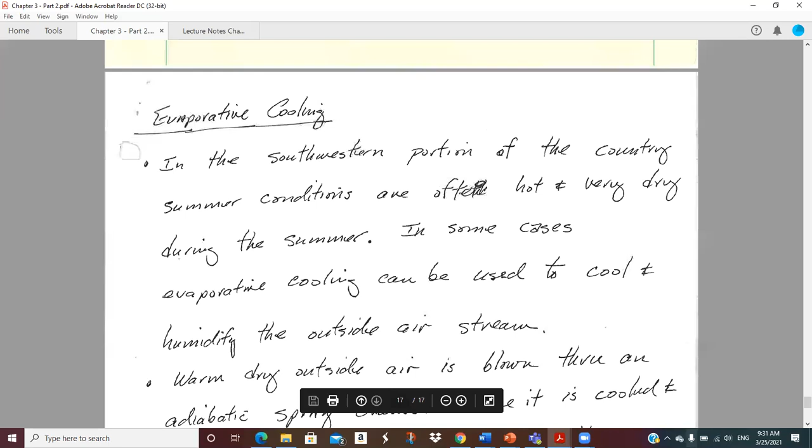Okay, let me see here. So this is our last topic in psychrometrics. You can tell this note page is not quite as old as the other one - it's not yellowed. Actually, they're yellowed because they're engineering paper, but this is just a white piece of paper. Anyway, so: evaporative cooling.

This is something we've kind of hinted around at, but we really haven't discussed the topic directly. In the southwestern part of the U.S. primarily, and other areas you might see this, typically areas that are pretty dry.

We can create air conditioning by evaporative cooling, which means all we need is a water source, a little pump, a fan, an enclosure, and some sort of cheesecloth or membrane that we can keep wet, and pass air through so the water evaporates. That evaporation process brings on enough cooling that we can actually cool a house. It's so dry in the Southwest that they want the water vapor in the air as much as they want the cooling, so it's a double win-win situation.

Now, unfortunately, when you get up to the eastern part of the U.S., the humidity and moisture in the air is such that they don't work very well, because the air coming in is not dry enough, and there's not enough potential to evaporate water vapor because the water vapor is already in the air. So you don't see it too much there.

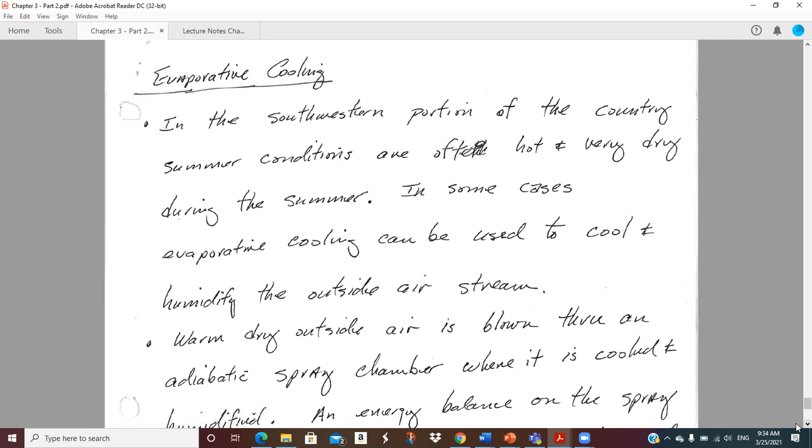Okay, so let me read my notes here, and I've probably already said most of this: in the southwest portion of the country, conditions are often hot and very dry during the summer. In some cases, evaporative cooling can be used to cool and humidify the outside airstream, which then conditions the space.

Warm, dry outside air is blown through an adiabatic spray chamber - well, that's the fancy engineering term. Basically it's an insulated cabinet, and you've got nozzles that atomize water vapor, and you blow it in there. But you've got to be sure everything gets evaporated, because you don't want to be blowing liquid droplets out of your diffusers. So usually there's some sort of membrane in there.

So the air goes through this adiabatic spray chamber where it's cooled and humidified. The energy balance on the spray chamber shows that the enthalpies in and out are the same, so it's a constant enthalpy device. The process line on a Psych chart is one of constant enthalpy.

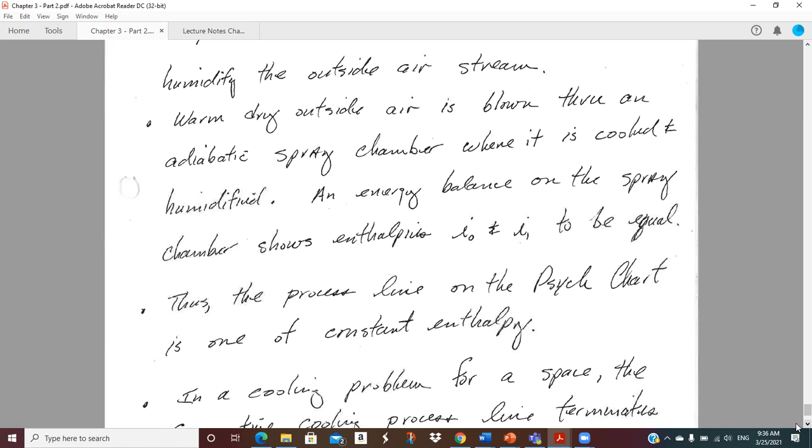Now, folks, you need to know that - that's probably the most important thing, other than just understanding in general what evaporative coolers or swamp coolers are all about. You need to know how to draw the process line on a Psych chart: it's a line of constant enthalpy. That's not very hard, but it's hard if you can't remember it. So remember it. Write it down. Do something.

In a cooling problem for a space, the evaporative cooling process line terminates at the space condition line, giving the amount of outside air needed to satisfy the load. Okay, so you can read that over again.

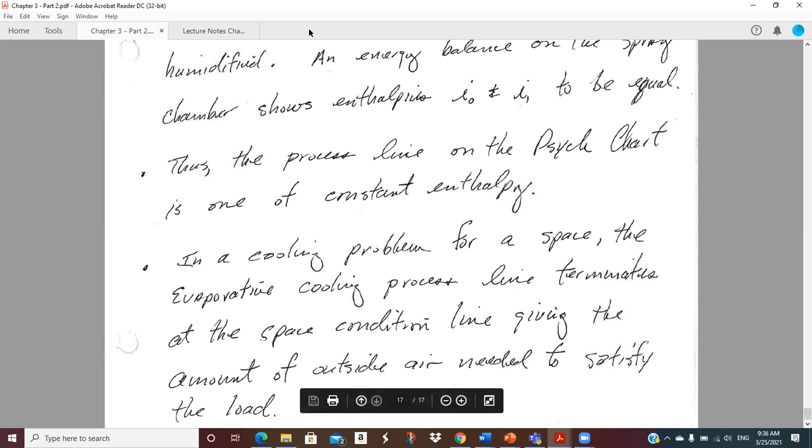Let's look at a diagram here. Get some pictures, pictures always help. Let me make it a little bit bigger. So there is our adiabatic spray chamber, i.e.

a swamp cooler. So we're coming in at 0, which is whatever you've got outside. That outside air is being moved, and there's got to be a fan. I didn't draw the diagram, but that air is not going to move by itself, so we've got to have a fan in there someplace, which he's not showing. But anyway, we've got a fan sucking in outside air into this adiabatic spray chamber.

And it's got nozzles, or it's got a membrane, or somehow the air goes across that wet membrane. And basically we get evaporation, hopefully close to saturation coming out. It just depends on the specs of the unit and how good it is.

But anyway, we're going to pick up moisture, and that evaporation process will cool the air down. So the dry bulb temperature will drop, but the moisture level will go up until we get to 1. And then hopefully, if 1 is on the condition line, and we've run our loads and all that stuff, then bingo, all we've got to do is blow in the right amount of air, and we handle our air conditioning load, both sensible and latent, and we keep the space comfortable, and we didn't have to run a compressor or all that, the stuff that goes with a regular refrigeration system.

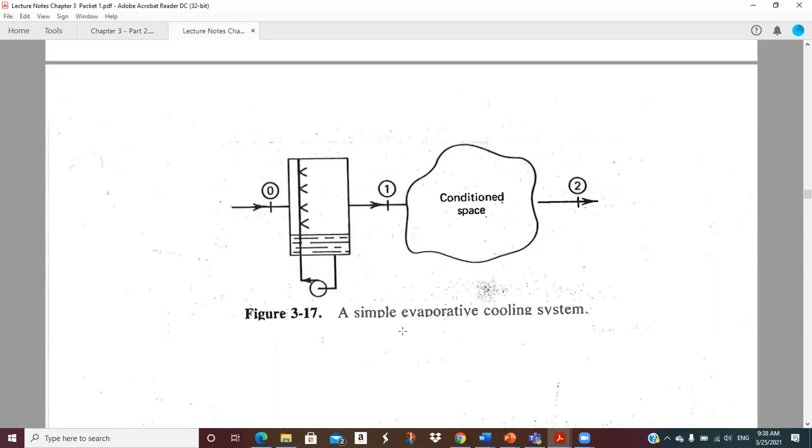So swamp coolers are pretty cool, no pun intended. Now let's go down to the psych chart.

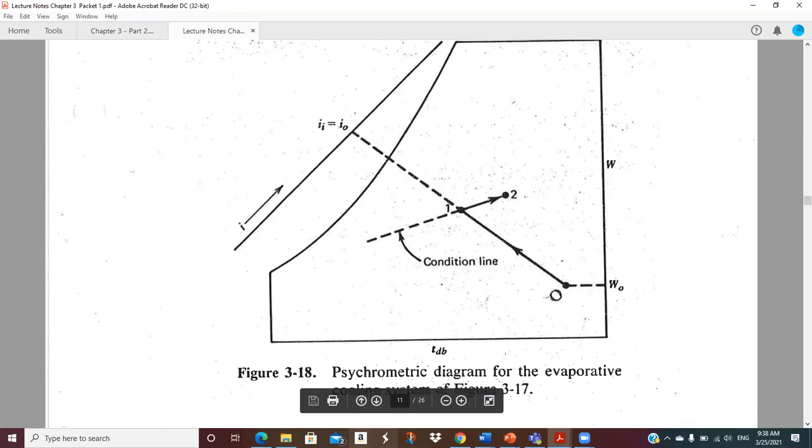There you go. So we've got our loads. We went to the protractor. Does he show... I don't think he shows a protractor on this. Nah, he didn't put the protractor up here. But anyway, we had our loads. We calculated our sensible heat factor. We went to the protractor.

We got the slope. We came down here, and 2 is the condition that we're maintaining in the space. And so it's air conditioning. So we drew our condition line with the slope from the protractor all the way down here someplace, okay? And then here's our outside air condition, whatever it is, it could change. But anyway, so you put a dot on the psych chart.

I have unstable internet, I just love this place. We still can't have good internet. I think you guys should start complaining about all the tuition you pay, and you can't even have stable internet. We can put grass all over the dadgum place. We spend more money on mulch and grass than we do on instructors, I think. It's ridiculous. I mean, it's nice to have a pretty campus, but I'd rather have stable internet and good teachers than green grass.

And if I was you guys, I would raise holy hell about that. And yes, I've recorded that, and I will post it.

Okay, so this is our outside air condition. And this is just a line of constant enthalpy. So whatever that enthalpy is, you find a line of constant enthalpy, and you draw that line all the way off the page, as far as you want to go. Make a line on the desk, I don't care. And if these two cross, then that's going to be the condition of the air that you want coming out of the evaporative cooler, because it's on the condition line. So it has the right amount of moisture and the right degree of coolness in order to offset your latent and sensible loads.

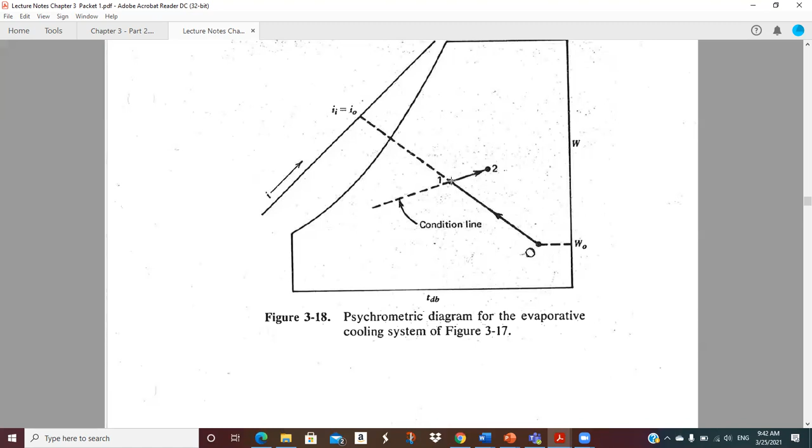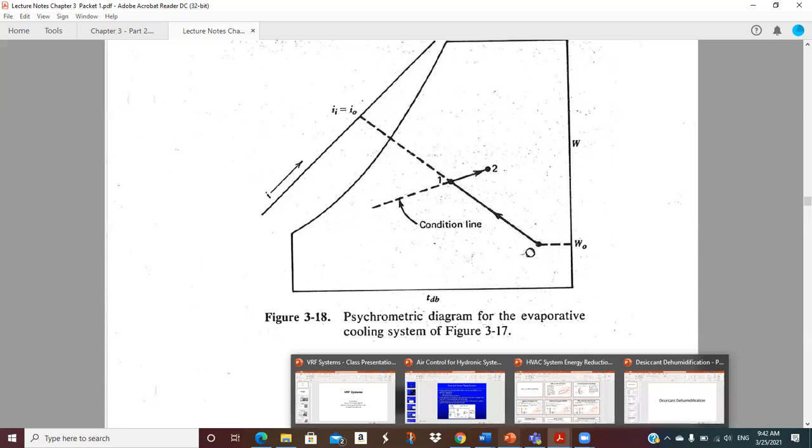Okay, let's see. So let's go to the Desiccant presentation here. And you guys have this. This is the last email that you got from me because I had forgotten about this.

So a desiccant is a material that has a great affinity for water vapor molecules. We're thinking about doing dehumidification from an airstream. So this moist air we consider to be dry air plus water vapor. Dry air is mostly nitrogen, oxygen, a little bit of argon, and an ever-growing amount of CO2. We lump that all together into dry air, and then we have water vapor.

So a desiccant is a solid material. Well, there are liquid desiccants, but in general in HVAC we usually use solid desiccants that you can put on a wheel or something you can force air across. And the water vapor molecules basically stick to the desiccant.

So in terms of grabbing molecules, there's absorption and adsorption. So this is adsorbed, and what that means is there's not a chemical reaction or anything. These desiccant materials have lots of little micro and nano scale cracks and crevices, all porous, and those water vapor molecules just stick to the surface.

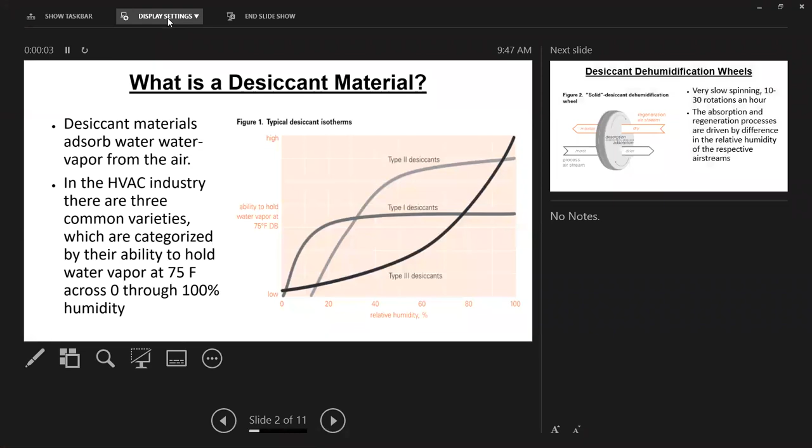Okay, so desiccant materials - that says 'ab' and that should say 'adsorb.' I'm going to change that right now. This was actually done by a student of mine a long time ago, and I didn't catch that. So it's adsorption, there you go. I've read this thing several times and didn't catch it. Just a little whoop-de-doo. Okay, they adsorb water vapor from the air. I'll fix that other one later.

In the HVAC industry, there are three common varieties which are characterized by their ability to hold water vapor at 75 degrees from 0 to 100% relative humidity. So that's how these things get characterized, and you see the plot over there - we've got type 1, type 2, and type 3. Type 3 are more recent, probably out there 15 years or so, but the other two have been out there much longer.

So if you look down on the bottom, you've got relative humidity from 0 to 100%. And then you've got just a characterization, low to high, of ability to hold water vapor at 75 degrees. So the temperature is not changing. We're just looking at this to give general characteristics. 75-degree air is just kind of a normal temperature in a space, something like that. So in order to put a curve like this, you got to pick a temperature, and 75 is just what got picked.

Okay, so the type 3 down on the bottom, when the relative humidity is low, like 0, 10, 20, 30, 40, 50, even 60, that desiccant can't hold very much water vapor. But if you put it in an airstream that's like 80 to 100%, it can hold a boatload. That's where it really shines. And so if you put it in, you know, 90, 95%, it's the highest performing of the desiccants, because it goes up over there close to around 100, it's up above the other two.

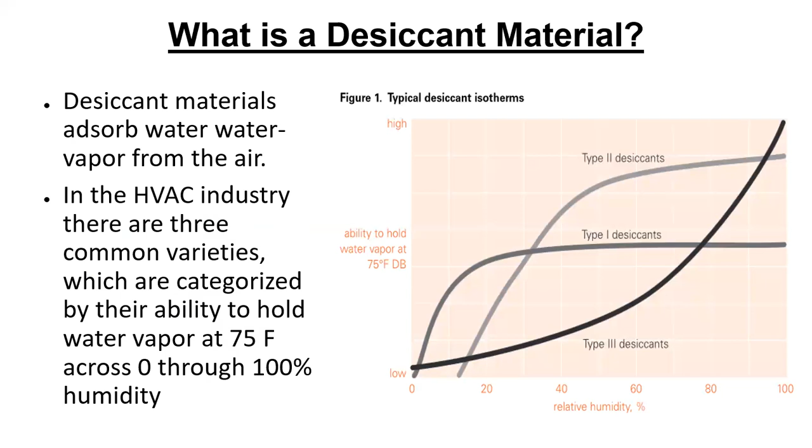Okay, all right, so traditional - back for years and years and years, this is how this stuff used to be set up. There's a lot of systems like this still in operation. It's not necessarily what we would do on new equipment today. This uses type 1 or type 2 because when these things were put together and installed, they didn't have type 3.

Dedicated regeneration system that includes a heater in order to lower the relative humidity. So on your regen air, these things were designed to have hot air blown across that coil to regen it. And of course, as you heat it up, then the relative humidity is going to fall like crazy. Okay, so if you look on the Psych chart over here, which shows both processes, let me see where I can get my marker so it stays visible here.

Okay, so this is outside air. This is where both of these are starting. So this is the regeneration air. We start with outside air for regeneration air, and then over here, this is what we're going to use to blow into the space for ventilation. It comes from outside too. So they're both going to start from the same place, air coming from outside. It's just that we're pulling some for regen, and pulling some other for actual ventilation air.

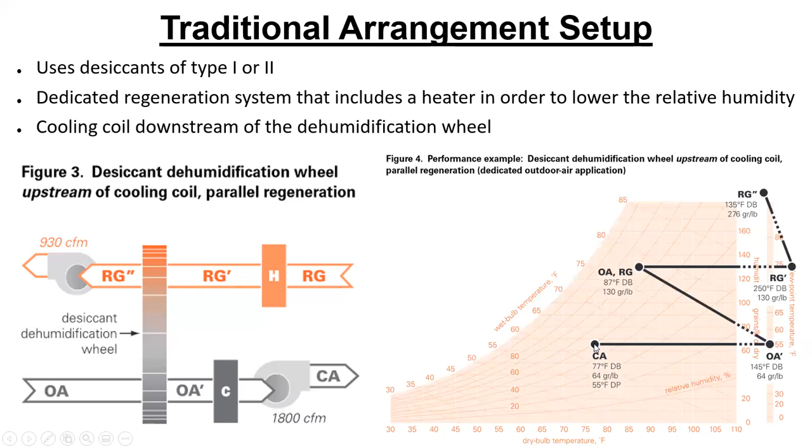So under the tag on figure 4, it says performance example, desiccant dehumidification wheel. The location of the wheel is upstream of the cooling coil, because we're going to have several configurations we're going to talk about. So this is upstream of the cooling coil, parallel regeneration, meaning I have a separate regeneration system to make this work. I think that's pretty much that slide.

Well, let's look at traditional arrangement problems. What are issues that come up with the operation of this? First thing, the heater requires additional energy and adds considerable sensible load on the system. So I've got to pay money to get from 87 dry bulb to 250.

And then that wheel is hot, so my outside air, when it goes across it and gets dried, is 145 degrees. And then I've got to turn around and cool that back down. So that's not great either.

Bullet point 2: conditioned air is usually neutral or even warm, which means we have to cool it down from 145. A cooling coil is more effective when wet - cooling coils do a better job operating when they're actually condensing water vapor. So this poor cooling coil doesn't have a chance because it's seeing 145-degree air coming into it.

Desiccants - and that's adsorb, should be adsorb, change that on your slide - adsorb more vapor at lower temperatures and higher relative humidities. When you put that outside air across that coil, it's not the highest relative humidity - it's got some for sure - and it's fairly warm in temperature. It's 87. It would be better if it was cooler and had more relative humidity; the coil would work better. So those are the comments on our traditional system.

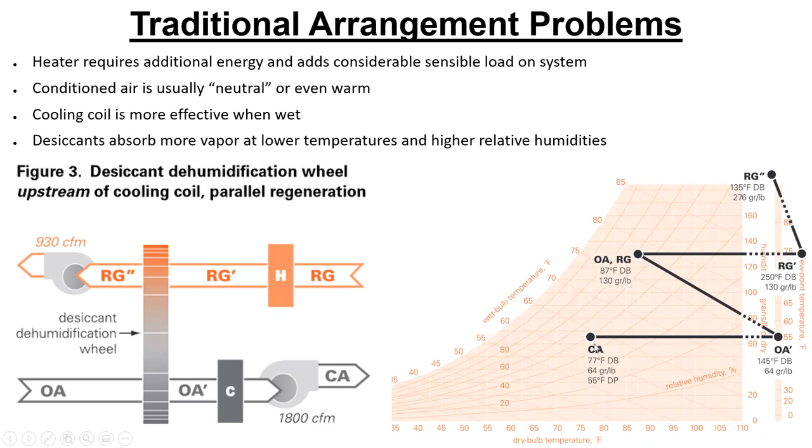All right, so let's change things around a little bit. This is called wheel downstream of cooling coil. So moving the cooling coil downstream helps address some of the previously mentioned efficiency issues while maintaining the same dew point. We still have parallel regeneration.

So let's look - we're starting at the same point right here. We got regeneration air and outside, and our ventilation air is both outside air. So the regen now is going across a heater still, but it's only heating to 114. Wow, that's a big difference - previously we were heating to 250.

And then we go across the coil and we exit at 139 grains per pound. So now this one is only picking up 9 grains per pound, and the air exits at 106. So this is much more benign in terms of temperature swings on the regeneration air.

So then on our outside air, we come in, we go directly across the cooling coil. Think about it - when you come off of that cooling coil, you're going to be cool, which we want, which helps the desiccant. And the relative humidity is going to be between 90 and 95% typically, which is going to help the desiccant. So this is a really good idea.

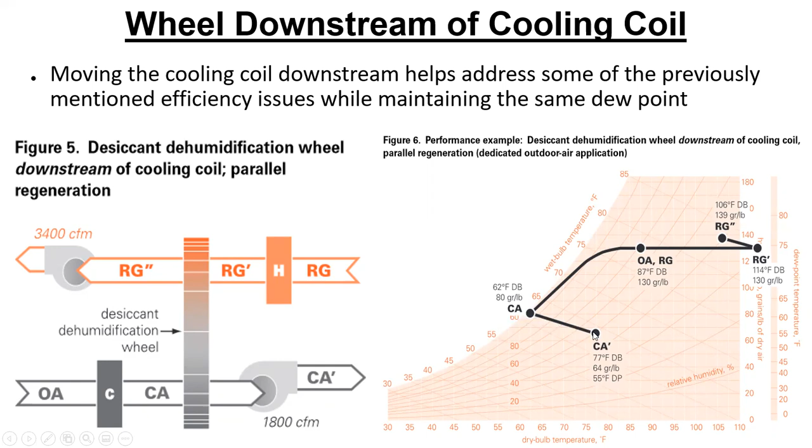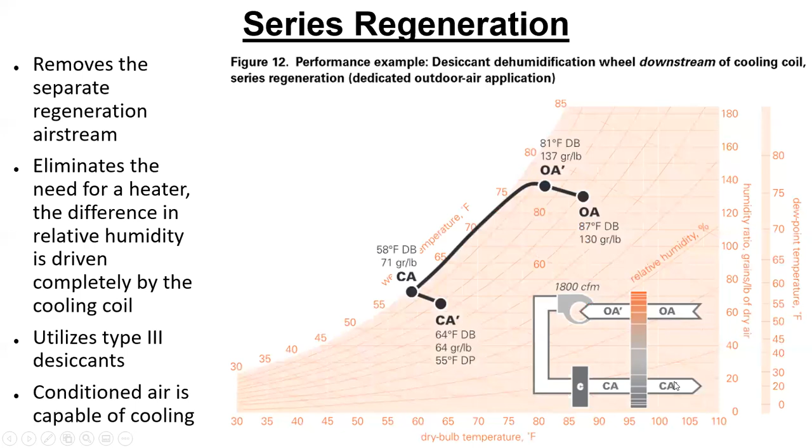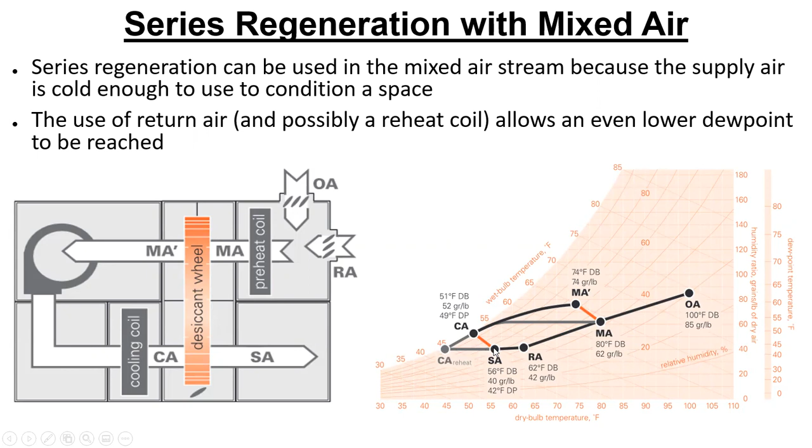Okay, now if we had a conventional system, they've also shown that here. Because with this conventional system, what we do is just mix our air and then go across the cooling coil. So mixed air goes across the cooling coil, and we go all the way down here to like 45 degrees. We have to go that low - that's cold air coming off a cooling coil - to get the moisture level down, we have to go to 45 degrees. And then guess what, we've got to reheat. So we would go across a heating coil to heat it back up again to get to this same point, because that's the point we want to go into the space. So that kind of compares and contrasts just the traditional way with this desiccant wheel approach.

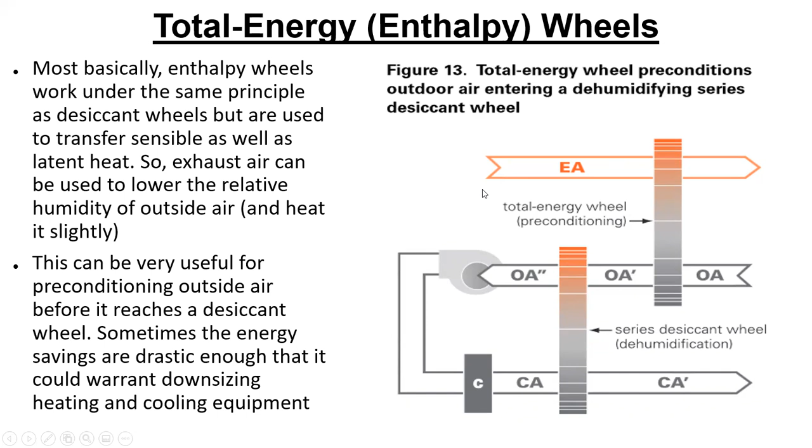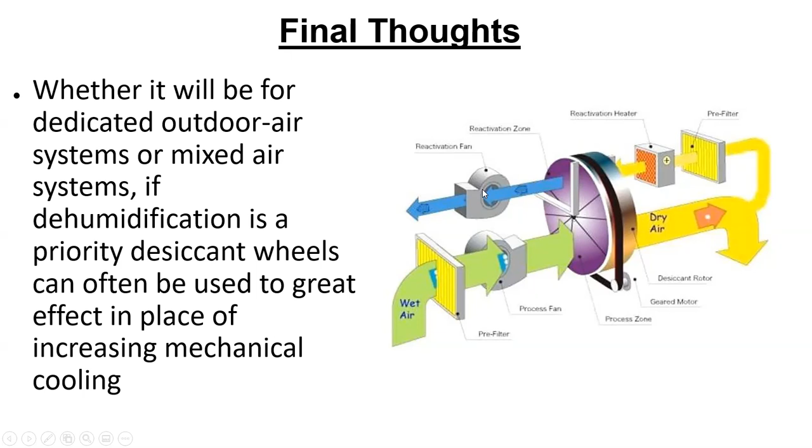Okay, questions or comments on this? Hearing none.

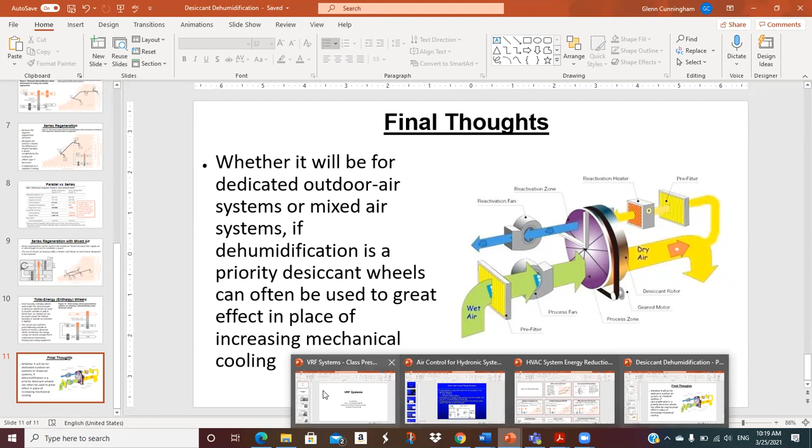Okay, so let's see, I know what we're going to do. We just have lots of different topics here. All right, we're going to talk about, for the rest of the hour probably, VRF systems.

If I had you all in the classroom, I'd want to know if anybody had ever heard of a VRF system. VRF stands for variable refrigerant flow. These have been used extensively in Europe and Japan for a long time. They've been fairly slow coming to the US. I don't know if you've ever been in maybe a motel or something that instead of having the through-wall unit had a blower unit up on the wall with a remote control that went to it. Well, that's a VRF system, okay?

And these things, compared to a traditional HVAC system, are much more efficient typically. You can save someplace probably between 15 to 40% of the energy. And so this is the new coming thing in HVAC in the States.

Just a second, I swear, I have to send my daughter a text. I have to send my daughter the Amazon passcode so she can spend money. Sorry.

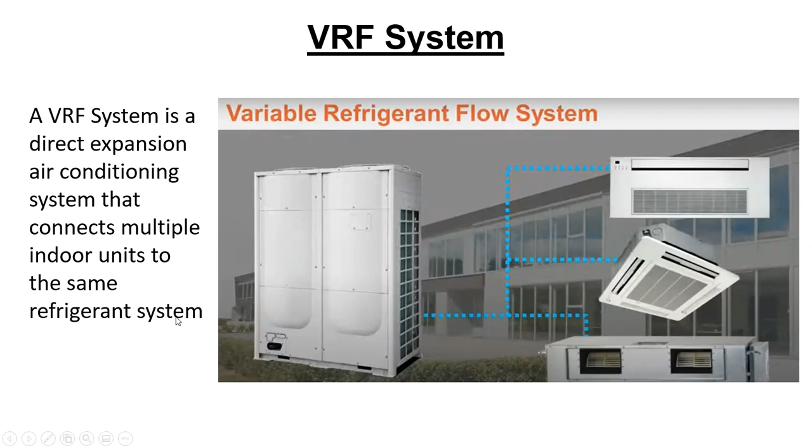Okay, indoor units are usually either in or very close to the spaces they are intended to condition, so there's little ductwork or none at all. This is one of the main energy savers, because these things don't have large horsepower supply fans and extensive duct systems blowing air a fairly long distance, requiring high static pressure to flow through the ducts and across the cooling coils. I mean, you still have to force the air across the cooling coils or heating coils, but the amount of fan energy is just going to be drastically less.

Okay. So that's something to note for sure.

There are cooling only systems, probably not in this part of the country, but there are parts of the world that are so warm that they just don't have to worry about heating. Heat pump systems can provide heating and or cooling, and heat recovery systems can provide simultaneous heating and cooling on the same outdoor unit. So you could have 6 indoor units and have 3 of them heating and 3 of them cooling. But these are all slight variations in types of VRF systems.

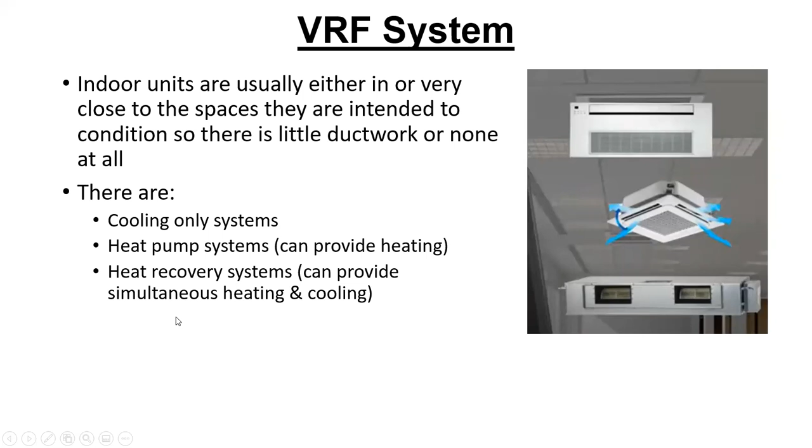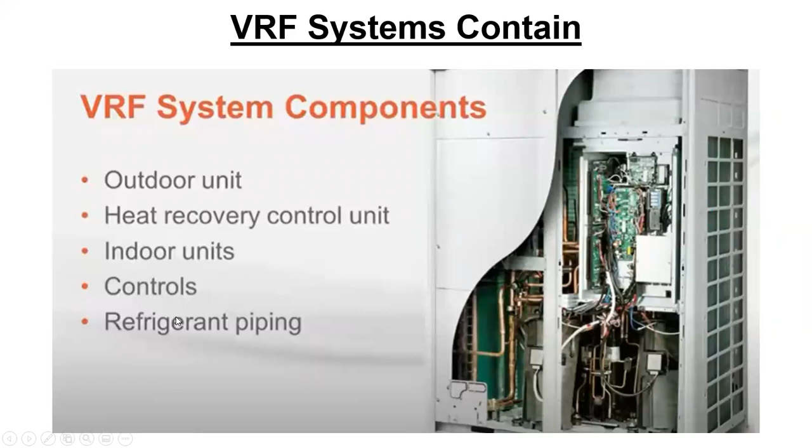Okay, system components. So we have an outdoor unit. We have what's called a heat recovery control unit. We have indoor units, controls, and refrigerant piping. And that's a picture of an outdoor unit sitting there.

Outdoor units typically contain 1 or more compressors, typically more than 1, because there are multiple indoor units with varying loads. Most units today contain multiple compressors, with at least 1 being variable speed, for capacity control. So they'll have a VFD on at least 1 of the compressors, because that's the most efficient way you can modulate the capacity of that compressor.

So if you just need 1, you would run the VFD. If you need 2 compressors, you would run 1 constant speed and the VFD. If you need 3 compressors, you would run 2 constant speed and the VFD, where the VFD is the one that's always adjusting its capacity to just balance out the amount of heating or cooling that the system needs. The name variable refrigerant flow refers to this ability to vary the amount of refrigerant that flows through the system.

Outdoor unit also contains a heat exchanger that serves as a condenser in the cooling mode. So just remember your refrigeration system. You come out of your compressor, if you're making air conditioning, cooling, and you go through a condenser, you condense it at high pressure, you go through an expansion valve, you get mostly cold liquid, and you put that into an evaporator and you evaporate it, and you get air conditioning. So this outdoor unit has this heat exchanger, and it's the condenser in cooling mode, or it could turn into an evaporator in heating mode.

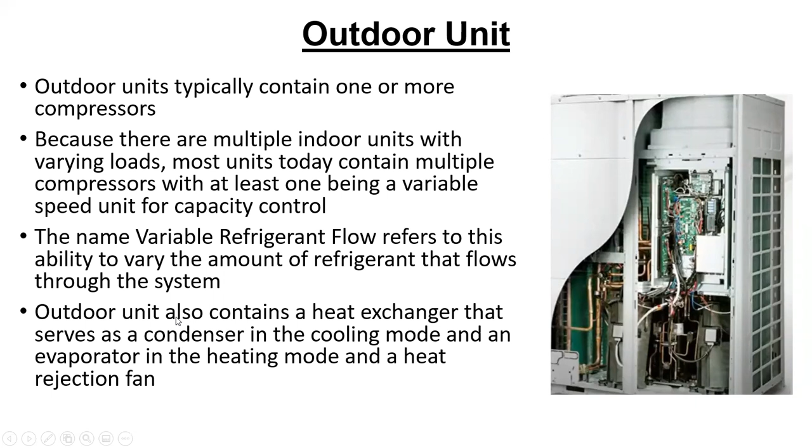And there's also a heat rejection fan. So in that respect, it's like a heat pump. An additional heat exchanger or intercooler is provided to increase subcooling in the cooling mode and superheating in the heating mode. So that's for efficiency enhancement.

Heat rejection fans. So if you're in a cooling mode, that coil outside is being a condenser, and you're going to blow outside air across it and reject heat to the atmosphere. So heat rejection fans may be fixed speed, variable speed, or staged. It depends how much you want to spend. Your variable speed are going to be best. If you have 1 fixed speed fan, it's just going to click on and off, and you could have 4 or 5 fixed speed fans that run a different number as the capacity changes.

An expansion device is provided to lower the refrigerant pressure before the outdoor coil when operating in heating mode, because in heating mode, that outdoor air coil is the evaporator. And so we got to get that refrigerant really, really cold so it can absorb energy from the outside air.

Oil separators are installed downstream of the compressor to reduce the amount of oil leaving the outdoor unit, allowing the unit to run at very low loads and accommodate very long refrigerant line runs. These things can have hundreds of feet of distance between some of these units. And when you get into this video, they give elevation distances and horizontal distances and all that sort of thing that the designer would need to know when laying out a system.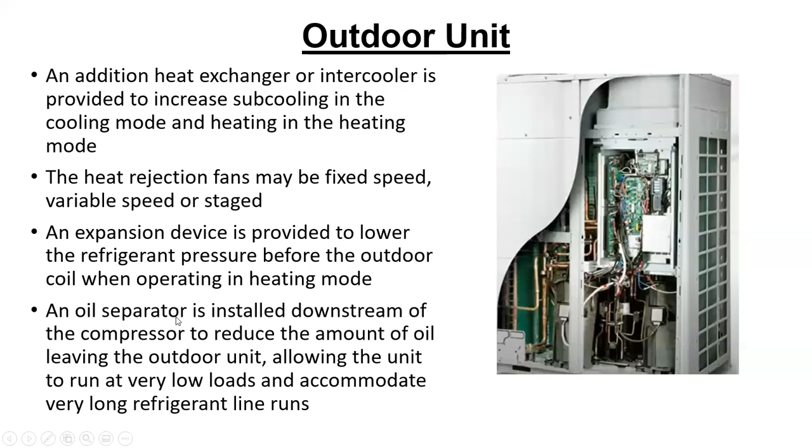Okay, let's see what it says here. During cooling operation, hot high pressure refrigerant compressed at the outdoor unit goes to the heat exchanger, which serves as a condenser rejecting heat. Liquid refrigerant is then distributed to the indoor expansion devices and evaporators to remove heat from the spaces. So we're just going to pipe that cold liquid refrigerant to each one of the indoor units where it has an expansion device. And then it becomes cold after it drops pressure, so it may be distributed.

It's probably distributed just after it condenses, so it's still fairly warm. But then when it goes through the expansion device, it gets cold with a little bit of vapor formed, and then you're ready to put it into the heat exchanger, which would act as an evaporator, which would provide cooling.

For the spaces. During heating operation, heat pump VRF systems reverse their cycle and refrigerant flow to provide heating. Here, the hot, high pressure refrigerant goes to the indoor units to provide heat to the space and condenses.

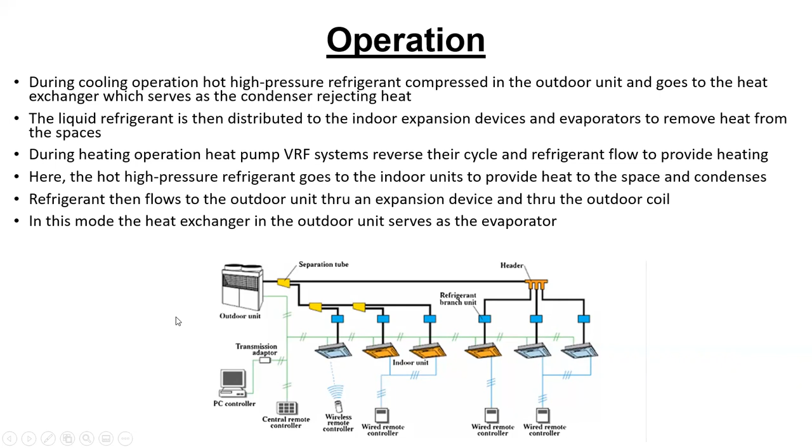Refrigerant then flows to the outdoor unit through an expansion device and through the outdoor coil. In this mode, the heat exchanger in the outdoor unit serves as the evaporator. So it's kind of typical, it's just you have multiple indoor units from what we had talked about before on heat pump operation.

Heat pump VRF systems can provide either cooling or heating, but not both at the same time. That sounds inconvenient. Because, what if you're conditioning 6 offices with a VRF heat pump system, and you get 2 people that want air conditioning and 4 people that want heat? Guess what? Somebody's going to be unhappy because it's either heating or it's air conditioning.

So if one space receives cooling, then all spaces will receive cooling. If one space receives heat, then all spaces will be supplied heat. Heat pump VRF systems cannot provide both heat and cooling at the same time.

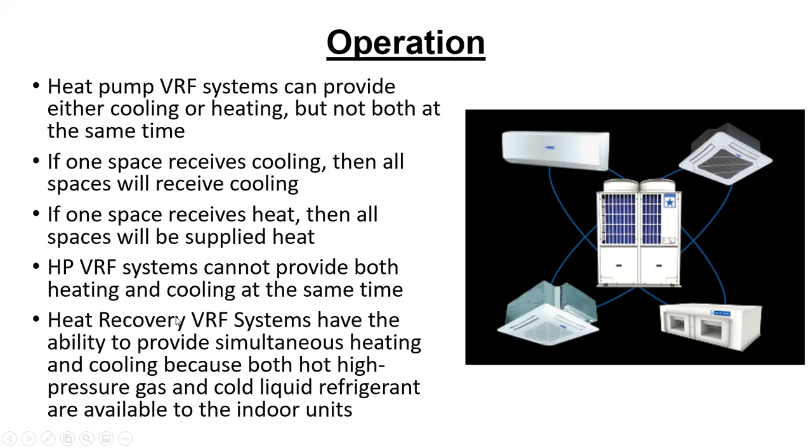Heat recovery VRF systems have the ability to provide simultaneous heating and cooling because both hot, high pressure gas and cold liquid refrigerant are available to the indoor units. So if you want to be able to simultaneously heat and cool, guess what? You got to go with the heat recovery system, which of course is going to cost a little bit more.

The heat recovery control module, HRCM, enables the system to provide both heating and cooling simultaneously. The control module acts like traffic police in that it is able to direct either hot gas or cold liquid refrigerant to the individual indoor units. This requires sophisticated controls that are able to determine and route the proper refrigerant stream to the indoor units.

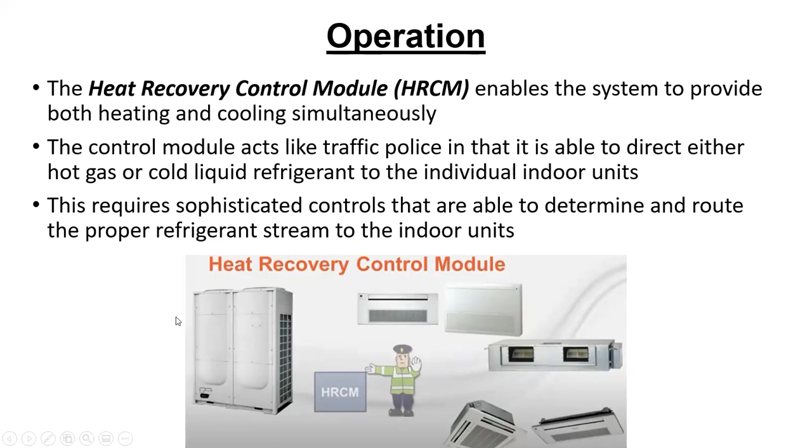So this is where the real sophistication of the system comes in. And if you're going to apply this in any sort of a commercial building, this is what you're going to have. You've got to give people the flexibility.

The heat recovery control module is connected to the outdoor unit, and a series of refrigerant lines is run to each indoor unit. The HRCM allows some units to heat and others to cool at the same time.

So you've got to be able to supply hot gas to an indoor unit if it needs heat, or you need to be able to supply liquid that then it'll put through an expansion valve that's going to get cold, and so then that indoor coil would be the evaporator and would provide air conditioning. And then you have to have a return line to get the refrigerant back to the outdoor unit so it can be recycled.

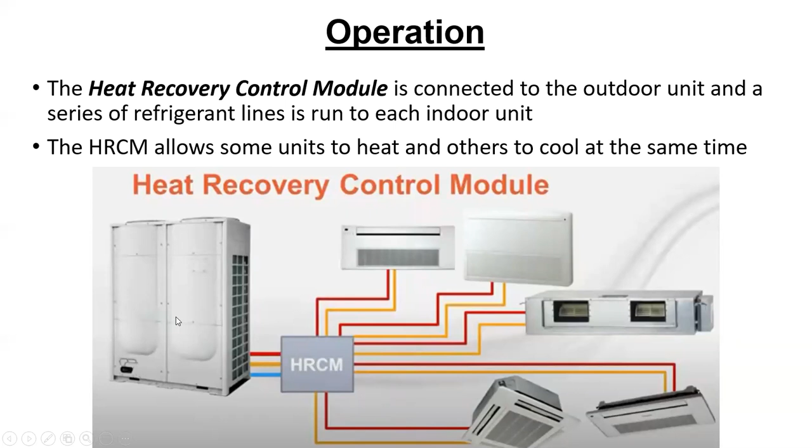The HRCM is able to route cold liquid refrigerant to the indoor units needing cooling while sending hot gas to the units needing heating. The HRCM can also route, now this is cool, refrigerant from one indoor unit to another unit directly, bypassing the outdoor unit.

So if you've got 2 zones that are sitting there about the same capacities, one is requiring cooling and the other is requiring heating, you can pass refrigerant directly between those zones and avoid going back to the outdoor unit and having it compressed again. So that's pretty slick. That's where additional efficiency enhancements come into play with this.

It's kind of like that water source heat pump loop where we had a water loop circulating. It's really the same concept. It's just we're dumping it into the refrigerant instead of dumping it into a water loop. But then you've got all the chemistry, the pressure, the thermodynamic changes in the refrigerant that have to be accounted for here to make this work properly.

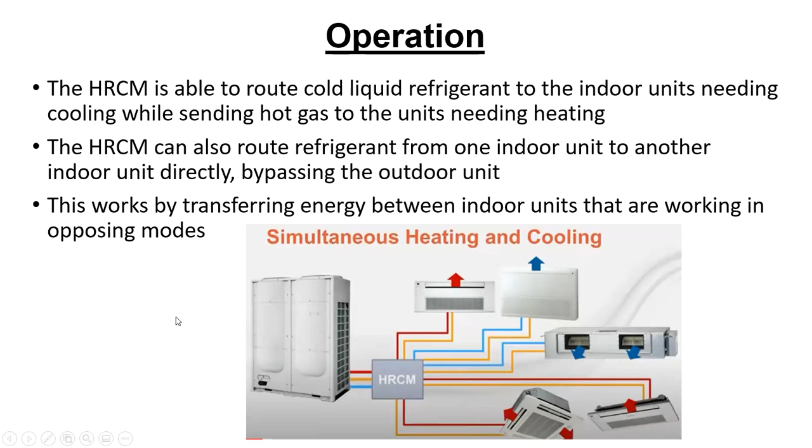So this works by transferring energy between indoor units that are working in opposing modes. Okay, indoor units, and we'll have more on this module here in a minute.

There are many styles of indoor units that can be selected for a specific application. They usually range in capacity from several MBH, thousands of BTUs per hour, to a couple of tons. Remember, 1 ton is 12,000 BTUs an hour.

Each has a fan or multiple fans. It may be constant speed, step, or variable speed. Each contains a coil and expansion valve for cooling mode. Some models are designed to fit into a small closet or above a drop ceiling and discharge directly into the occupied space.

Other units require small sections of duct to discharge air into spaces. So like these guys on the bottom, this would go, say, above a drop ceiling or maybe in some sort of closet, and then you'd have to run a little bit of duct work to get to some diffusers to distribute the air. These cassettes set in the drop ceiling, and these guys just set high on the wall. This is what you see sometimes in motel rooms and that sort of thing.

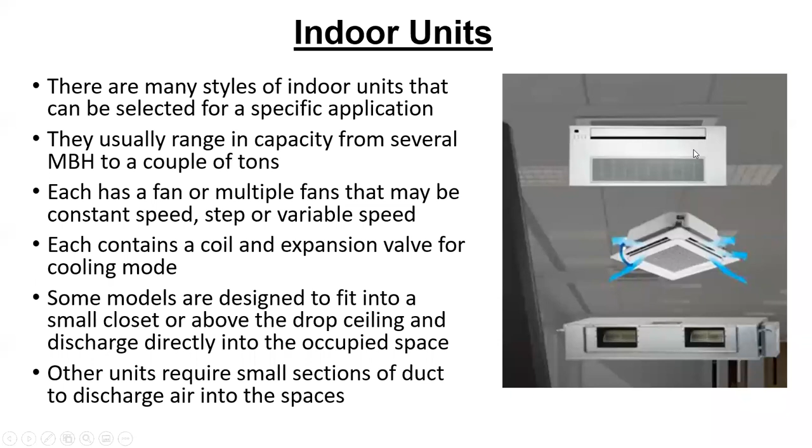Controls are key to a VRF system. It includes zone level, system level, and building level control and proper integration to ensure good operation. At the zone level, a wired or wireless control unit allows individual space temperature control. This is almost like a remote control on your TV. I mean, it can be wired, but I think they're typically not at this level.

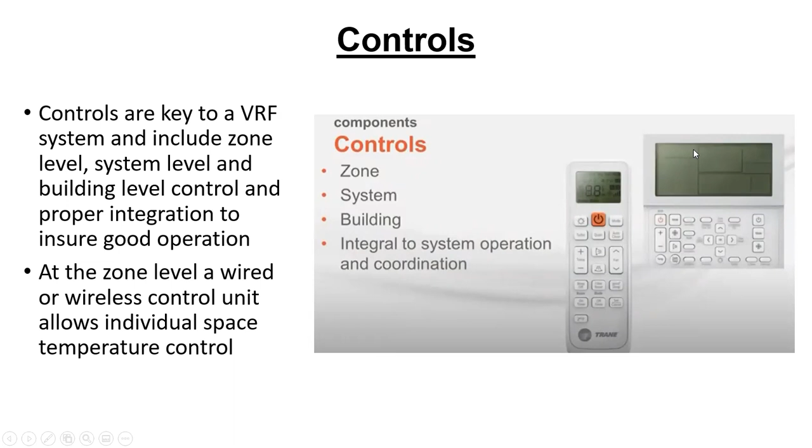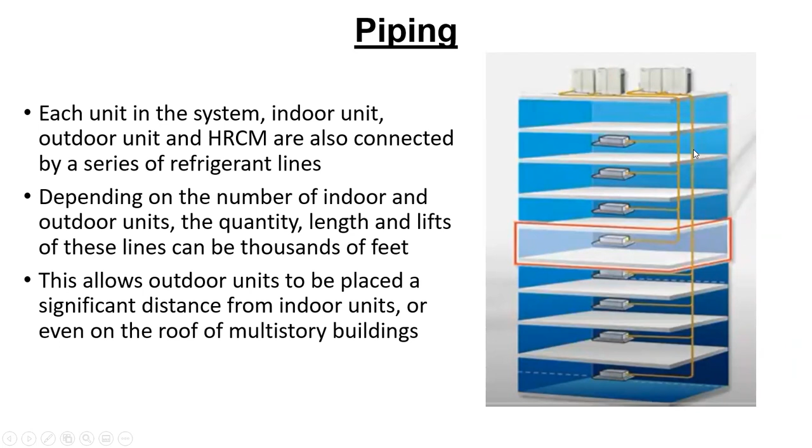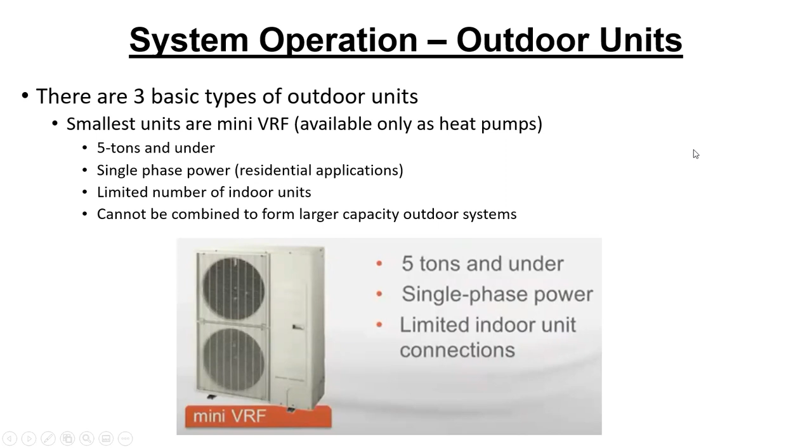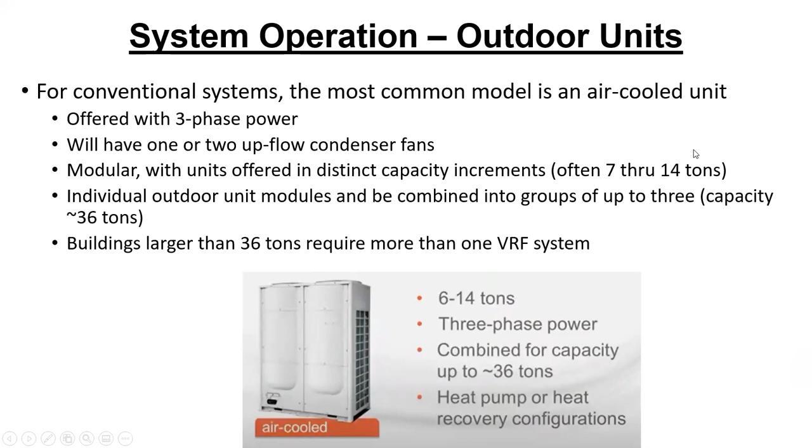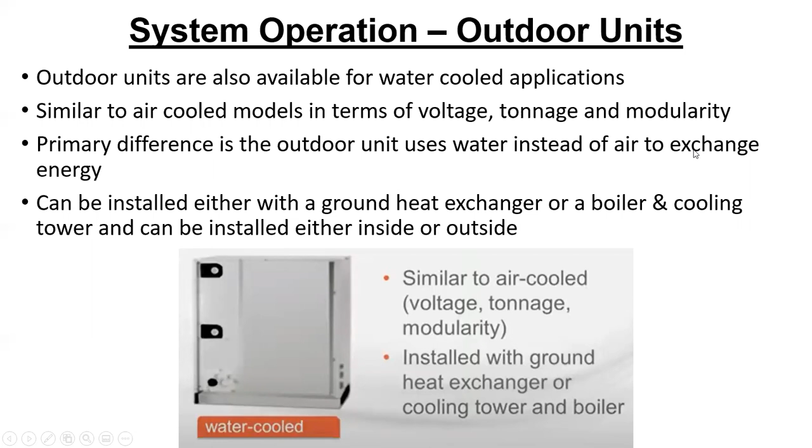Outdoor units are also available for water-cooled applications. Instead of air-cooled condensers, they have water-cooled condensers. You'd then have to have a cooling tower, some sort of cool water source, to make that operate. Similar to air-cooled models in terms of voltage, tonnage, and modularity. The primary difference is the outdoor unit uses water instead of air to exchange energy with the environment. It can be installed either with a ground loop heat exchanger or boiler and cooling tower, and can be installed either inside or outside. There's a little picture.